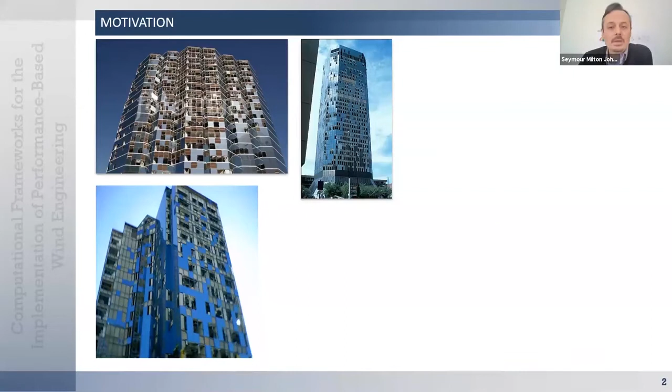The motivation for this work comes from the significant damage that can occur to engineered buildings during severe wind events such as hurricanes. This is illustrated here with respect to the envelope system in hurricane winds in Florida, as well as to the structural system during these severe wind events, illustrated in terms of some yielding and some collapses that have happened.

So what we're going to do today is go through some of the tools that I have been developing in my research group for implementing performance-based wind engineering that are capable of mitigating these damages and losses through explicitly enabling the estimation of performance of the structural system, as well as explicitly estimating the performance of the envelope system. We're going to look at these two aspects, starting with methods and tools for estimating the performance of the structural system.

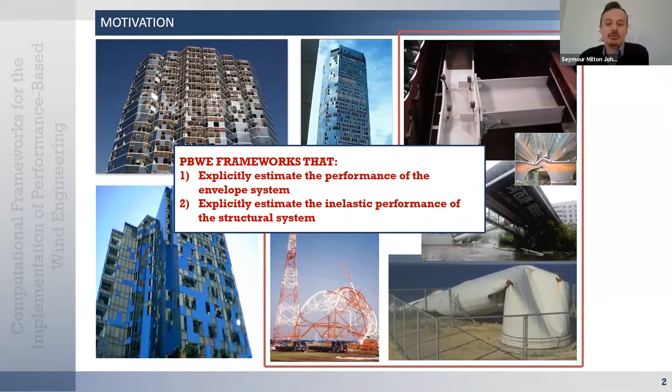Challenges in modeling and estimating the response of nonlinear or inelastic structures subject to severe winds include the need to model and capture ratcheting failure in alongwind-type loading, as well as the need to capture failure due to potential low cycle fatigue, which occurs in acrosswind-type loading scenarios where we get alternating plasticity in long duration loading. These two potential failure mechanisms are unique to wind as compared to seismic engineering, where we're more used to carrying out nonlinear analyses, so they require special attention.

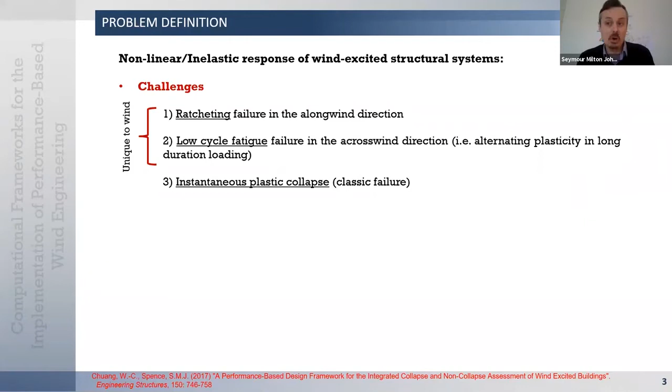Thirdly, we need to be able to model and capture more classic instantaneous plastic collapse.

Before we get into how we've been looking at doing this, some of the benefits in allowing the structural system to be nonlinear or inelastic during severe winds include the possibility of designing more economical structural systems without compromising reliability, as well as gaining knowledge of the ultimate response behavior of the structure, even if we don't necessarily use it in satisfying reliability targets, as well as enabling the use of performance-based design, which requires knowledge of the behavior of a structural system over a full range of hazard intensities.

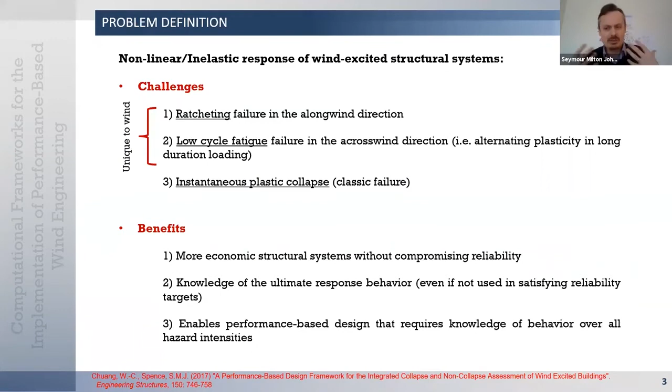In the tools and work in my laboratory, what we've been doing is developing models that enable the consideration of inelasticity or nonlinearity in the structural system through allowing a state of dynamic shakedown during an extreme wind event. So what do we mean by this?

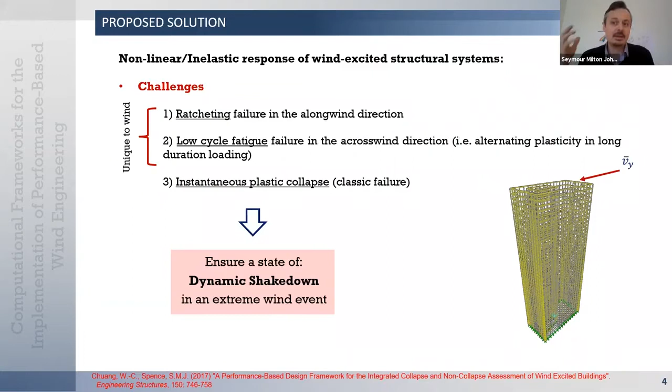Let's say we have a structural system, and that structural system is subject to a wind event, which is characterized in terms of intensity by the maximum mean hourly wind speed at the top of the building.

We can then associate aerodynamic loads, so time-dependent aerodynamic loads acting on the structural system. What we want to do is, under these loads, allow inelasticity to occur, but ensure that the state of dynamic shakedown is reached. This state of dynamic shakedown is a performance objective, something we are trying to achieve to ensure safety against these failure mechanisms.

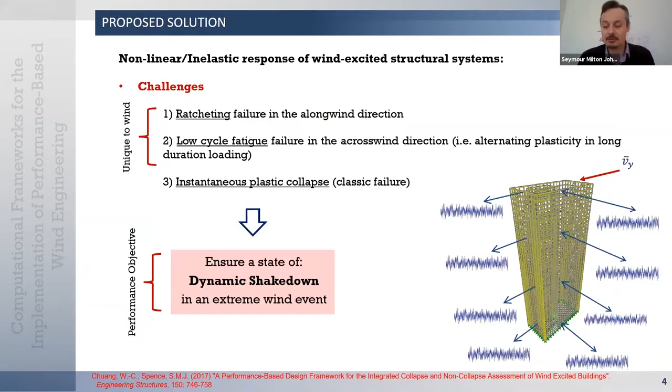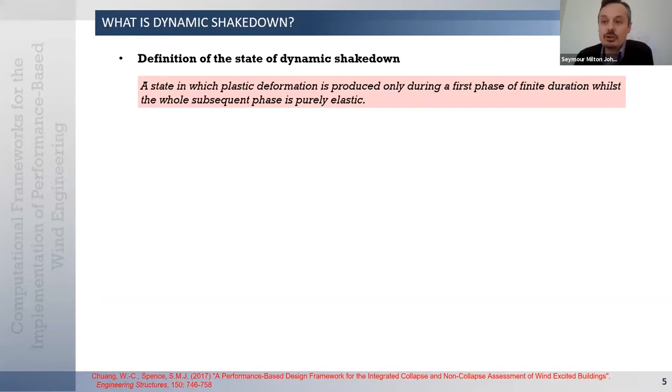So what is dynamic shakedown? It is a state in which plastic deformation is produced only during a first phase of finite duration, while the whole subsequent phase is purely elastic. If this occurs, the structure is said to shake down to a purely elastic state, or to adapt to the loads. Shakedown on its own implies the finiteness of overall plastic deformation.

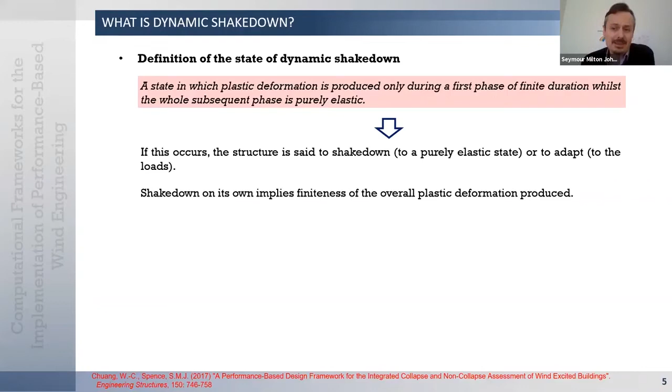Using the theory of plasticity, one can demonstrate that if shakedown occurs, the structure cannot fail due to ratcheting — an along-wind type failure mechanism for a wind excited structural system — or low cycle fatigue failure, which is a type of crosswind or alternating plasticity, low cycle alternating plasticity failure, or instantaneous plastic collapse. It ensures safety against these kinds of failure mechanisms.

So how can we go ahead and identify this state of dynamic shakedown? We can use a direct approach. In this approach, what we want to do is consider some dynamic time-varying loads on the structural system that are periodic and of infinite duration — so it's a periodic, infinite duration loading.

What's important to recognize here is that what happens within the period is completely free, it's arbitrary. So you can consider a stationary, a non-stationary, any type of dynamic wind load history one wants to consider in that period. We are just considering that load history repeated indefinitely.

We then go ahead and consider the material to behave in an elastic, perfectly plastic fashion. That can be at the level of individual fibers, if you're looking at a fiber discretization, or it can be at the level of the section resultants, so the section resultant deformations as well as forces.

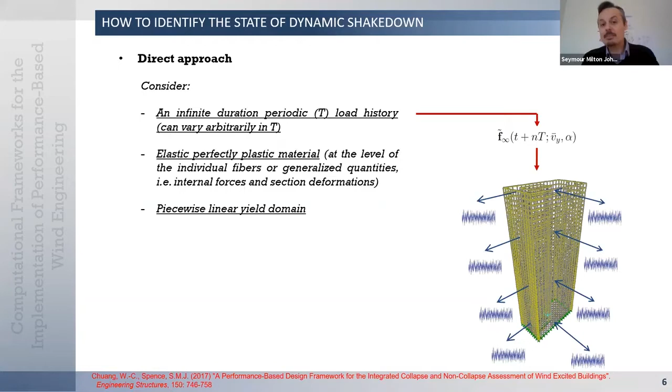And then we go ahead and consider a piecewise linear representation of any yield domains we might be considering. Therefore, we represent these failure domains as a series of flat surfaces. Now, this is not a limitation, because we can consider as many flat surfaces as we want and get a higher resolution representation of that domain — as high resolution as we desire.

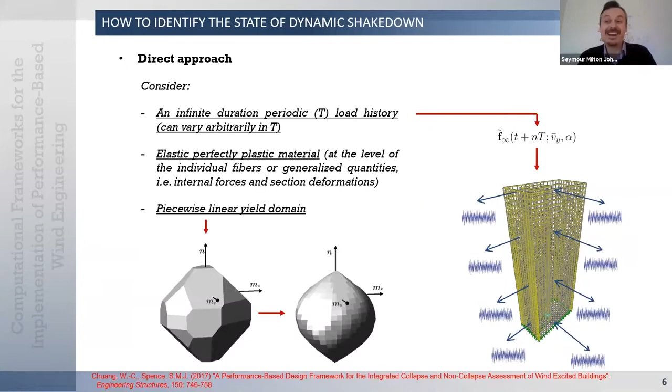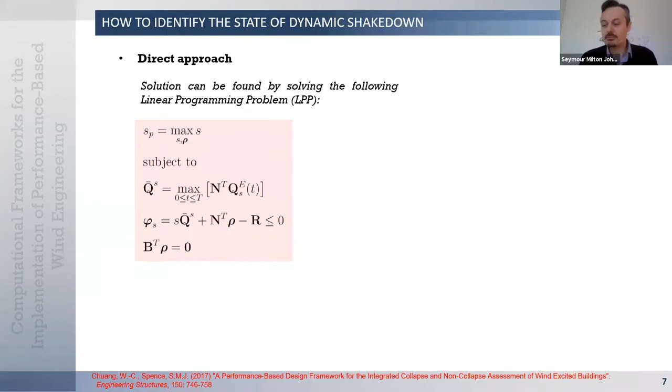So how do we go ahead then, once we have these assumptions, and estimate the state of shakedown, or whether the state of shakedown has occurred? What we need to do is go ahead and solve the following linear programming problem, which is a standard optimization problem, in terms of S here.

So what is S, which we're trying to maximize? S is a load multiplier, a scalar that we're going to use to amplify those dynamic time-dependent loads acting on the structure. So we're just going to amplify the entire loading history through this multiplier, and we're going to try and look for the maximum amount we can amplify them in terms of rho here.

So what is rho? Rho is a time-independent, self-equilibrated stress state. It's the stress state that is associated with plastic distortions that occur if we are in an inelastic response regime. We're solving for the maximum load multiplier while considering the three constraints we can see beneath the optimization problem.

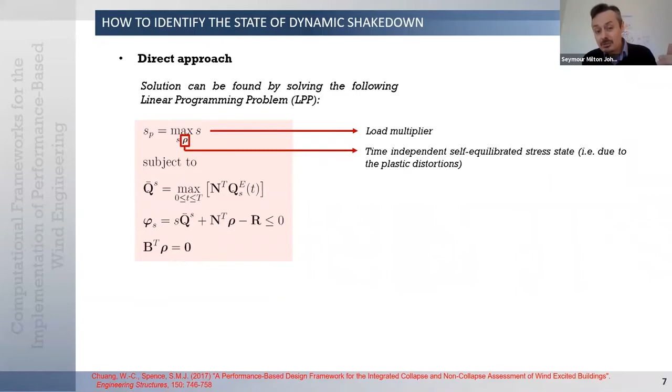These constraints: the second is simply the yield domain, so we've got to be inside the yield domain at each integration point of the discretization. Then the third is simply compatibility. What's interesting is the first, and this is representing the excitations within the structural system.

And what we want to note here is that it's actually in terms of the purely elastic steady state response in that one period of loading. So we're going to solve this considering only elastic responses.

What we can state is this: if this multiplier is greater than 1, we can amplify the loads above and beyond that actual value, which is when S equals 1, the structure will shake down under that loading history. So even though we've got inelasticity, we're going to be safe from potential failure mechanisms.

We can also observe that if we impose that self-stress state to be equal to 0, what we're imposing is that we don't have any inelastic distortions, and therefore we're actually finding the limit at which we get first yield somewhere in the structure, associated with how we design structural systems for wind in current practice. So if SE is greater than 1, under the real load history we have, we're going to have a purely elastic response state.

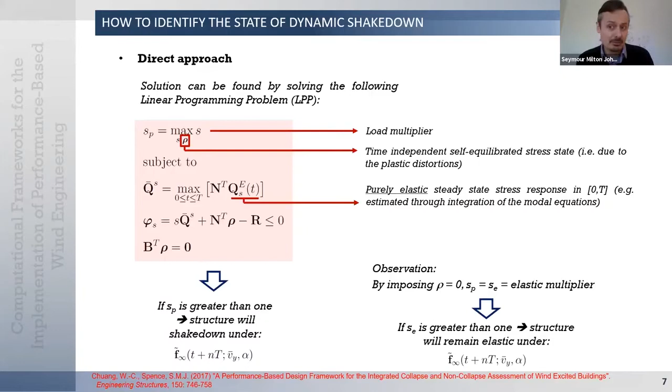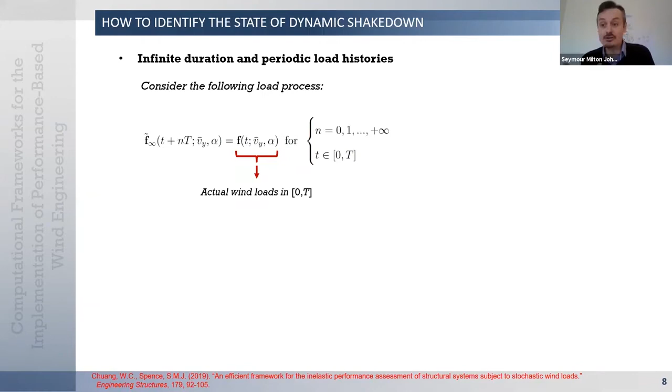So let's go back to this loading. We said that these loads need to be infinite duration and periodic. What does this really mean, and how do we do this? In practice, all it means is that we take a wind loading history of interest of duration t, and we consider it repeated indefinitely. What's important is that whatever happens in that loading period can be any type of load we want it to be. It can be stationary, non-stationary, anything we need it to be.

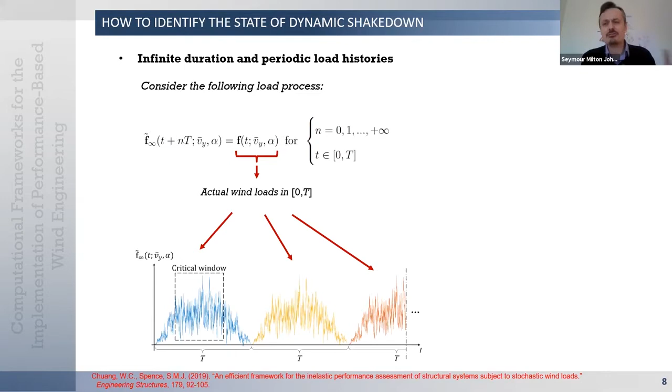For example, we can go ahead and use wind loads directly estimated from wind tunnels—wind tunnel specific or building specific aerodynamics. Or we can take that aerodynamic information and calibrate more sophisticated stochastic models for representing the record-to-record variabilities one would see in the aerodynamic loads. That's what we've been doing in the models we've developed, using spectral proper orthogonal decomposition—using information on how those aerodynamic loads behave from the wind tunnel, but then calibrating probabilistic models that allow us to capture record-to-record variability.

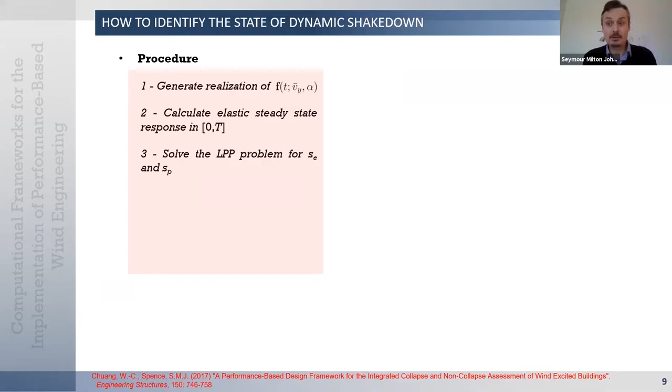So this is the loading process. Once we have a representation, a model for the loads, all we need to do to estimate whether the system is going to shake down or not is consider the realization of the load we want, calculate the steady state elastic response for one period of loading, and then solve that linear programming problem.

At that point, we can take the multiplier, the scalar we can multiply the dynamic loads with, and say that if SE, the elastic multiplier, is greater than 1, then the structure simply remains elastic under the loads, satisfying current design practice, which requires that structural systems are elastic under extreme wind loads.

If the elastic multiplier is less than 1, but the shakedown multiplier SP is greater than 1, the structure will shake down under that loading history. Finally, if the shakedown multiplier is less than 1, then the structure will not shake down. So these are the 3 outcomes we can get.

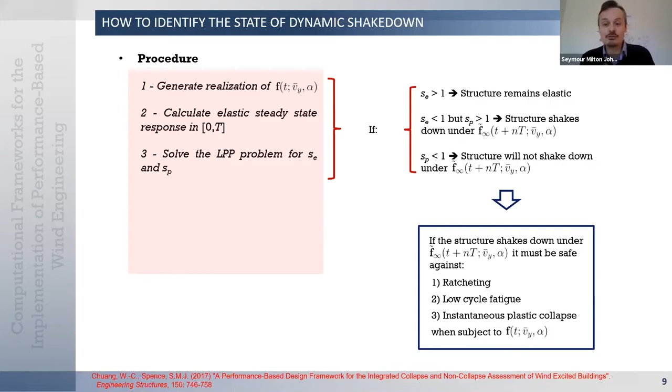In particular, if the structure shakes down, so that our shakedown multiplier is greater than 1, what we can say is that the structure under that load history is safe against failure due to ratcheting, low cycle fatigue, or instantaneous plastic collapse under that load history.

What we can then go ahead and do is consider any number of load histories we want, and solve one of these linear programming problems, getting information on the probabilistic distributions of the two multipliers. What we can actually observe is that this linear programming problem is extremely efficient to solve, even for very high dimensional problems.

Also, in defining the constraints of the LPP problem, we only need to calculate elastic responses. This means that if we have very long duration loads, for example wind loads associated with hurricanes, we can solve this type of problem and propagate uncertainties through it to get estimates of probabilities of having a safe inelastic state.

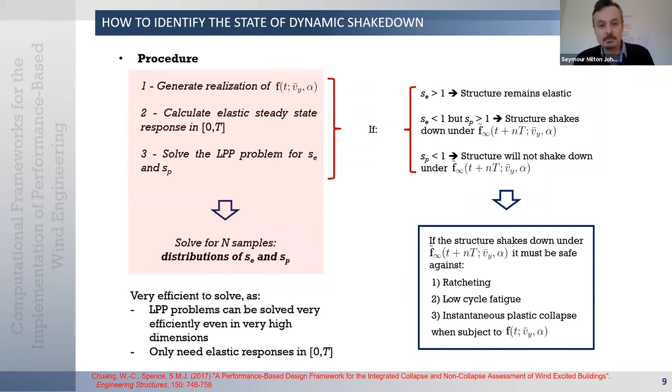So non-shakedown can only be considered as one possible collapse limit. This is important. In general, collapse will involve multiple limit states. For example, we may have incapability to reach the state of shakedown, but we may also have excessive residual or peak displacements at shakedown, or excessive plastic deformations at shakedown.

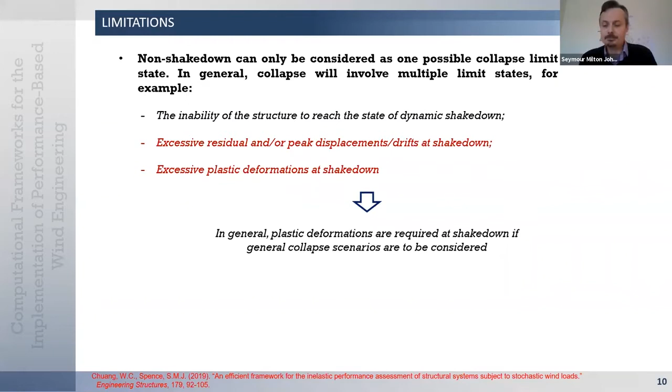So in general, plastic deformations are required at shakedown if general collapse scenarios are to be considered and estimated. One of the problems we can highlight is that by solving an LPP problem, which is a relatively classic way of treating a shakedown problem, we don't get any information on the plastic deformations. That's a limitation.

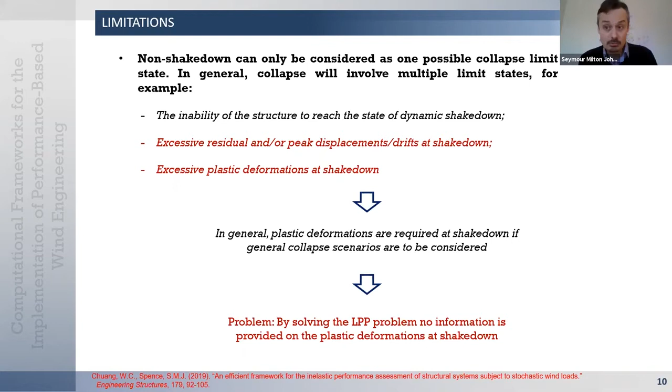To overcome this, over the past 2 or 3 years, we've developed a number of new algorithms and tools to be able to solve the shakedown problem and also estimate the deformations, all the plastic deformations at shakedown. So how do we do this? We use an indirect approach—this is a path-following algorithm. The basic idea is to estimate the state of shakedown through algorithms that follow a simulated path.

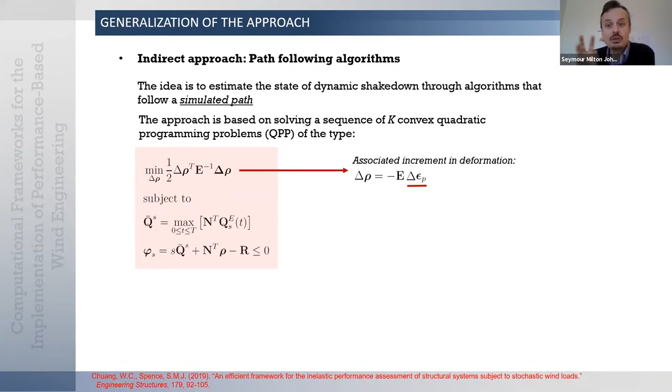So the approach is based on solving a sequence of K convex quadratic programming problems of the type shown here. In practice, what we're doing is looking for increments of that self-stress state rho, indicated here as delta rho. But we're going to associate with each increment of the self-stress state an increment in deformation, delta epsilon p, so of plastic deformations. And we do this through a return mapping scheme.

So what this allows us to do is that once we solve this sequence of quadratic programming problems, not only do we have knowledge of whether the structure will shake down or not, but we can calculate the plastic deformations associated with the state of shakedown. And then what we can do with this knowledge is estimate a full range of responses at shakedown, considering the inelasticity that has occurred inside the system.

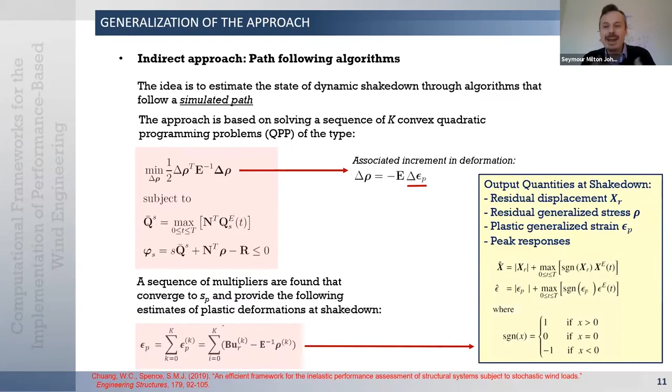So we get direct estimations of residual displacements, residual stress states, plastic generalized strains at all the integration points, as well as peak responses that have contribution from the inelastic state. So we can use these to evaluate acceptance criteria associated with a whole range of limit states.

So to give a summary of how this works, in practice we need to create these finite element models, for example in OpenSees, where we model the entire structural system. We need a load model for the aerodynamic load on our system, that's generally calibrated to some wind tunnel data, so we can capture phenomena such as vortex shedding or detached flow.

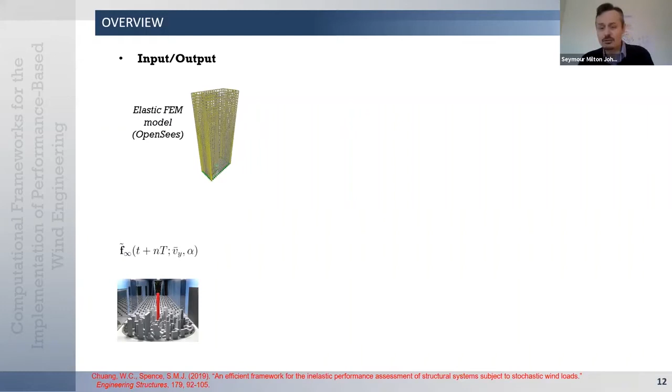We then bring these two together, and in particular, using those LPP problems together with the path-following algorithms, we can solve the shakedown problem, and we get answers to questions such as, did the structure experience inelasticity? If so, did the structure shake down?

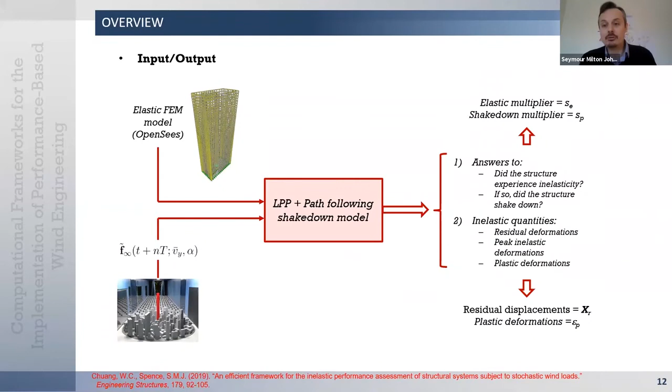Now, with the path-following algorithms, we also end up being able to directly estimate all the inelastic quantities. So you know what the residual deformations are, peak inelastic deformations, plastic deformations, etc.

What's fundamental to observe here, for a wind event of duration of 1 hour, so let's say we take a nominal 1 hour wind event, this is around 2 or more orders of magnitude faster than using classic direct integration approaches.

And if you're considering longer events, such as hurricanes that can go on for hours, these algorithms are even faster. They become multiple orders of magnitude faster than direct integration because you only need elastic response estimates.

So what this means is that we can use stochastic simulation for assessing the probability of failure or the reliability of our systems, considering a whole range of uncertainties. Not only uncertainty in the loads, but uncertainties in all the properties within the system.

And this allows us to go ahead and estimate system-level failure probabilities that we can then use with state-of-the-art performance-based design criteria for estimating the safety of the system, or whether we meet performance objectives associated with inelasticity in the main wind force resisting system.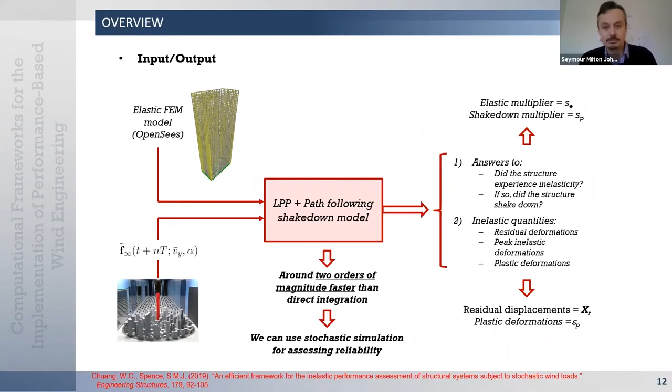So let's just go through an example here. We're going to look at a 59-story building that is an archetype building, which was provided to us by Magnusson Klemencic engineers. This is a building which was an archetype building located hypothetically in Seattle. It had a concrete core, and outriggers, a steel outrigger system with mega columns.

We had some nominal gravity loads we were considering here. The numerical model was made in OpenSees, had over 5,000 displacement-based beam column elements. We had about 5 integration points per element, etc.

We considered a whole range of uncertainties. Here we were considering uncertainties in the structural properties, so things like the elastic modulus of both the concrete and steel, damping ratios, material properties, the yield strengths of the concrete, the reinforcing in the concrete, as well as the steel members, so the steel strengths. We had load uncertainties in the dead loads, live loads, as well as the wind loads.

Here we were characterizing the wind hazard using maximum mean hourly wind speed to occur at the building top. We developed a site-specific hazard curve for a lifespan of 50 years. In developing this, we also took into account the uncertainties in the meteorological data.

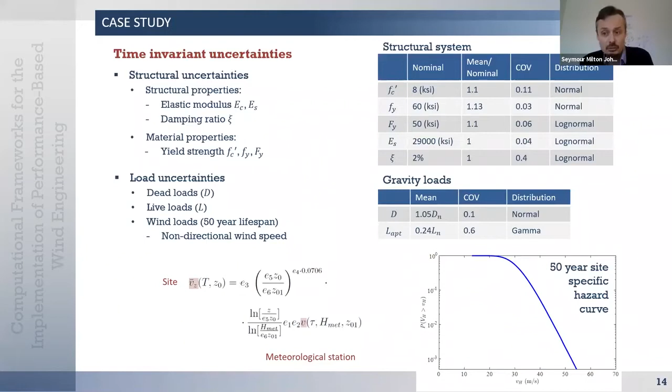We also considered uncertainties in the wind direction. To do this, a site-specific hazard analysis was carried out, which gave us directional factors that we incorporated into the analyses, considering uncertainties in these factors as well.

Record-to-record variability in the actual dynamic wind loads was captured through the spectral proper orthogonal decomposition model, where we calibrated it to specific wind tunnel tests for that building geometry. Uncertainty generated by the use of wind tunnels was also considered in calibrating the load model.

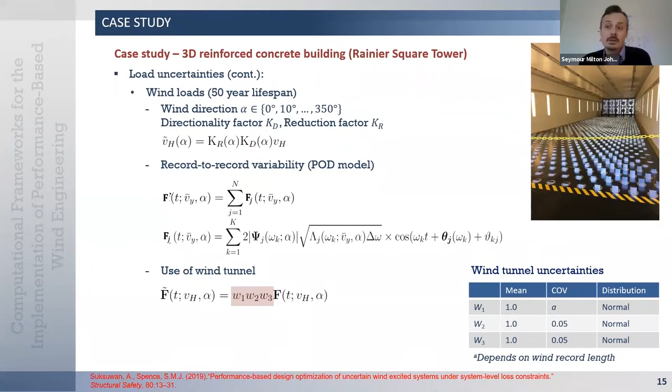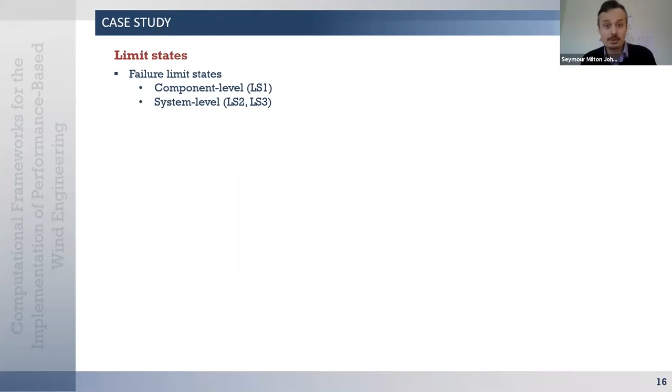Limit states we considered: first, the component level limit state. This was a classic design limit state used in design today—first yield in any one of the members considered separately. Then we had two system level limit states. The first one looked at member first yield anywhere in the system.

The second limit state here, LS3, the third limit state we considered in the analysis, was an inelastic limit state, where what we were looking for is non-shakedown or excessive peak interstory drift anywhere in the building. That means a peak interstory drift exceeding h/100, with h the interstory height, as well as permanent set—residual deformations or drifts more than h/500.

So that limit state LS3 allows inelasticity to happen in the structural system. Failure is when we get excessive peak interstory drifts, excessive permanent set, or we are not capable of reaching the state of shakedown—meaning we're potentially at risk of low cycle fatigue failure, ratcheting failure, or instantaneous plastic collapse.

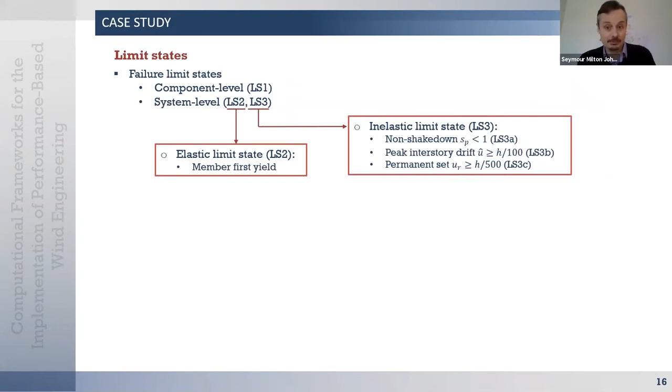We went ahead and calculated the probabilities of failure with respect to these limit states, considering all of these uncertainties. We did not use direct Monte Carlo here; we actually used a smart simulation algorithm to push the samples into the tail.

The results are as shown here. These are written in terms of the reliability index, transformed from the failure probability. We directly estimated failure probability and then back-calculated the reliability indexes for easy comparison with target values that can be found, for example, in the ASCE 7-16 design code.

So we just go back to these two—these are the first yield limit states. We can see the first one, LS1, gave us a reliability index of about 3, and that's associated with first yield, considering each component separately.

The second limit state is interesting—that's LS2—and it gives us the system level first yield reliability, which was 2.8, associated with yielding anywhere in the system. That's kind of a system level limit state associated with current practice.

Then LS3 here, this is our limit state based on inelasticity. You can see the reliability was about 3.3. And if we look at that a little bit more in detail...

What we can see is the reliabilities associated with non-shakedown are about 3.3, while reliabilities associated with excessive deformations were actually very high—peak interstory drifts over 4, and with respect to permanent set, over 7. That means this structure, which experienced inelasticity, did not deform excessively. This illustrates the usefulness of allowing inelasticity in these structural systems. We're using the systems more by allowing inelasticity, and we're not compromising reliability, as these systems are not deforming excessively.

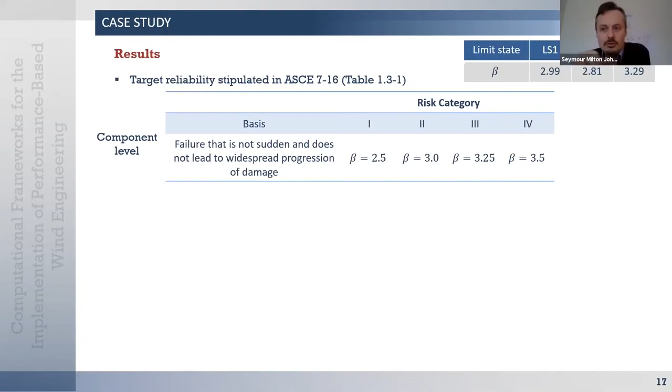Now, if we relate this to what we can find in literature, in particular target reliabilities coming from ASCE 7-16, the design or load code, what we can see is that at a component level, these were the stipulated target reliabilities. Our building is right here at risk category 2, as it was designed to be risk category 2, and it achieves a reliability of 2.99.

Now, if we look at system level—and this is where performance-based wind engineering says everything should be done and assessed at a system level—what we can observe here is that the reliability index at a system level of first yield, using classic design approaches, satisfies a risk category 1 building, but not a risk category 2 building.

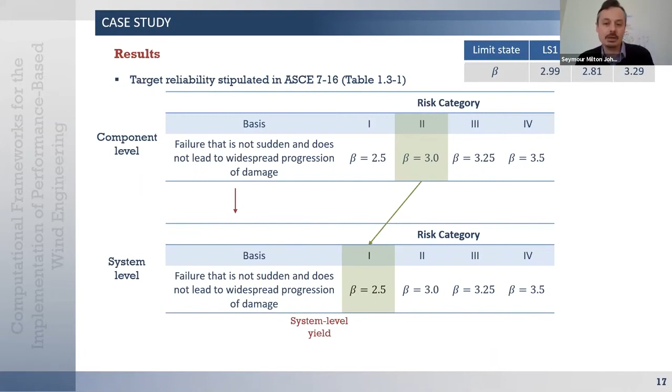However, if we allow inelasticity to occur safely using the criteria that we've introduced today, we can see that we can achieve a reliability of over 3.25.

So we get a risk category 3 building. We're using the structural system more, allowing inelasticity, and increasing the reliability because we know these inelastic states are safe. If we relate that to what reliability we'd need using classic methods to achieve this system-level reliability, we'd have to design to a risk category 4 building. So right now we can design a risk category 2 building with classic methods and end up with, if we look at system-level performance allowing inelasticity, kind of a risk category 3 design. That illustrates the usefulness of allowing some inelasticity and the tools we've developed here, which allow one to quickly estimate where one stands in terms of these reliabilities.

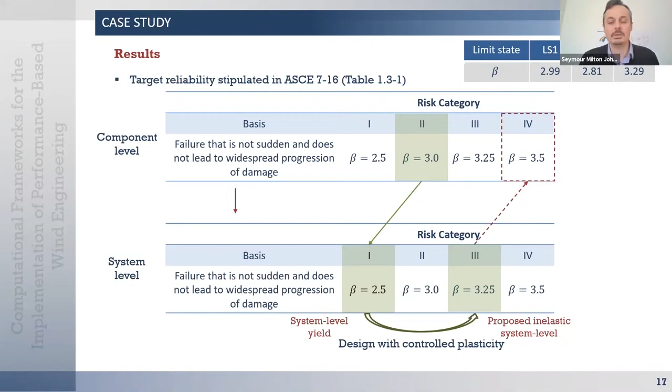This brings me to this document here. This is a pre-standard published in July 2019 for performance-based wind design, published by the American Society of Civil Engineers. I've got this here because it explicitly enables designers now to use the approaches I've just talked about. So those tools based on shakedown and allowing inelasticity at ultimate load levels are now contemplated in this document, as are the tools we've just outlined.

So performance-based design is moving towards allowing inelasticity during ultimate load levels for designing the main wind force resisting system, in a similar fashion to what we do with earthquake loads.

For more information, I've got a list of references you can use if you want more details on the models I've been discussing, some more details on the algorithms, and some more case studies. These are all publications we've put out over the past 2 or 3 years while developing these approaches.

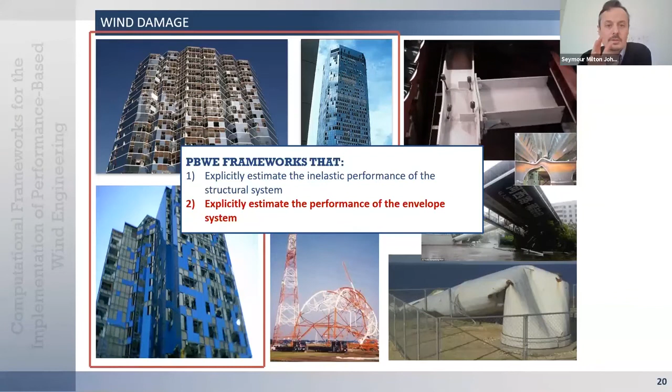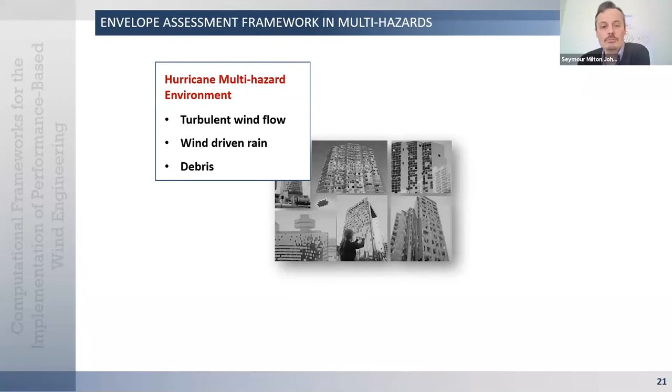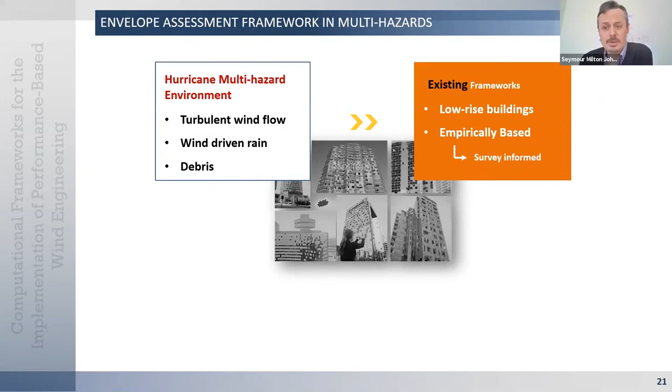This is a multi-hazard problem involving turbulent wind flow, wind-driven rain, as well as debris. Existing frameworks are really focused more on low-rise buildings and are empirically based rather than model or physics-based, so they can't be easily applied to engineered systems. The models I'm going to introduce in the next few slides were developed with the idea of applying them to mid- to high-rise buildings, based on physics models and data-driven models.

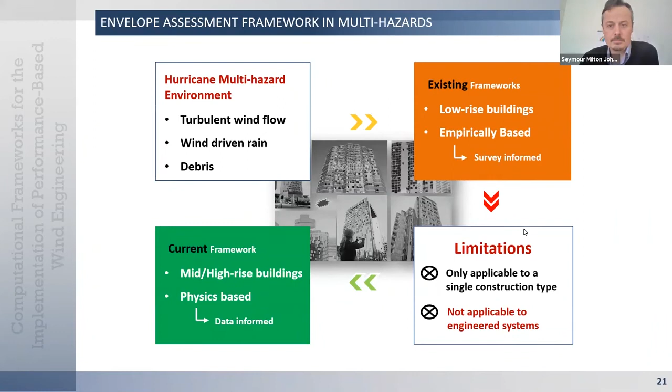The basic idea here is to estimate performance by solving the probabilistic integrals shown here. We want to assess performance as the mean annual rate of exceeding a decision variable threshold of interest, something like repair costs associated with damage to the cladding system. In general, we want to give a probabilistic description of the hazard and get a probabilistic description of performance through this mean annual rate of exceeding the decision variable threshold.

To do this, the first thing we need is a characterization of the hazards, in particular the wind hazard as well as the concurrent rain event. In general, we'd also have to characterize the debris hazard, but we're not going to discuss that today. The wind event, through local dynamic pressures, will directly excite the envelope system. It will also, through the aerodynamic loads on the structural system, excite the envelope system through interstory drifts. So both these mechanisms can cause damage to the envelope system.

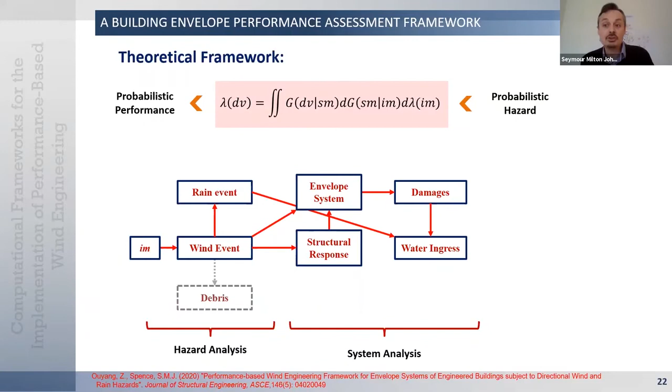These damages can lead to subsequent rainwater ingress due to the concurrent rain event. We want to estimate these damages as well as the water ingress, then take the damages and, through loss and consequence analyses, turn them into envelope losses associated with envelope damage, as well as an estimate of the total water ingress due to the damages. That water ingress would also be used for estimating the interior losses.

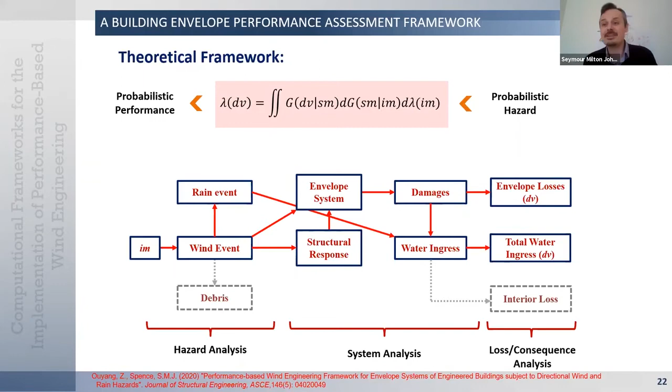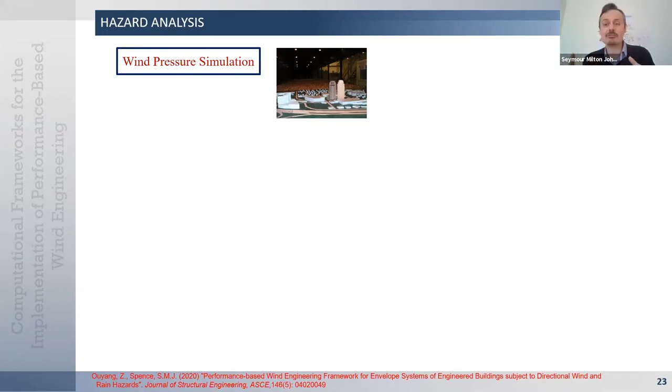With respect to the wind pressures, what we're doing is using wind tunnel data to characterize the aerodynamics of the building. In particular, the wind tunnel process comes directly from a wind tunnel test on the building, and we use spectral proper orthogonal decomposition that allows us to estimate the principal loading modes, which capture phenomena such as vortex shedding.

Once we have those loading modes, we can give them a spectral representation. Using a spectral representation model, we can capture non-Gaussianity through data-driven translation models, and that gives us a stochastic representation of the external wind pressures. Here, not only are we capturing the non-Gaussianity, we can also capture record-to-record variability that you cannot capture if you just use that one wind tunnel realization of the local pressure process on the outside of the building.

With respect to the rain event, we're going to represent the wind-driven rain through a time-average solution, using Eulerian multiphase models. These are based on representing the mean wind field around the building using a RANS model. We then use the Eulerian multiphase model to capture the turbulent dispersed rain around the building, and estimate the catch ratio, or wind-driven rain, on the entire building envelope. Multiplying the catch ratio by the horizontal rainfall intensity R of H, we get the wind-driven rain on each component of that envelope system.

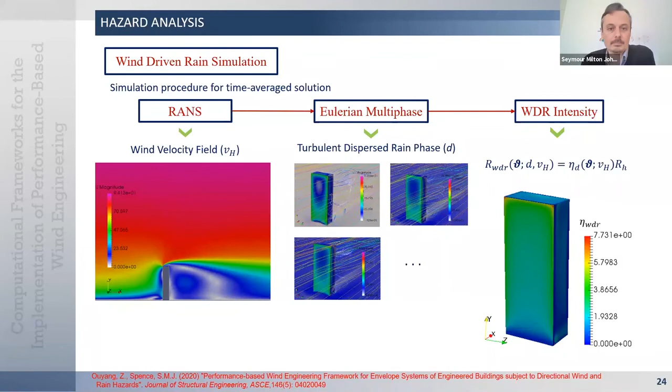Once we have the wind-driven rain, what we're interested in doing is estimating how the structure responds to the external loads in terms of drifts. To do that, we need to solve the classic dynamic equilibrium equation. For the excitation, the loads, we just integrate that non-Gaussian stochastic wind pressure model or field, which gives us the loads driving our dynamic equilibrium equation.

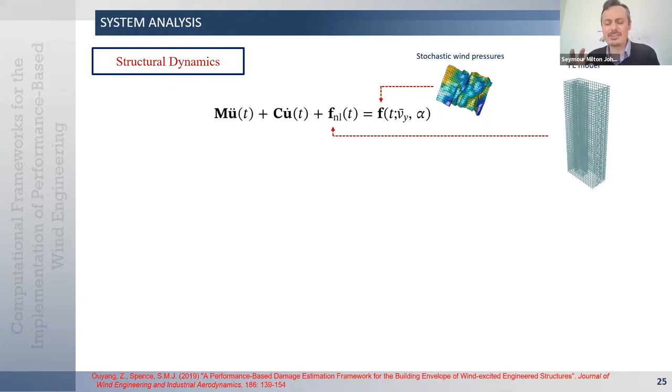For the restoring forces, we can use classic finite element models, or we can use models based on the shakedown theory that I introduced in the previous slides. That gives us a direct estimate of the time-varying dynamic drifts in our system.

Then what we need to do is consider internal pressures. These are also going to be dynamic, driven by the dynamic external pressures and any openings that may be in the envelope. Once you've got an opening, you get a dynamic internal pressure, which is governed by a nonlinear equation. You need to solve that for each opening, both the external openings and the internal openings at each floor.

As you go through, you end up defining a set of nonlinear equations that need to be solved iteratively at each time step as you progress through the wind event. What's important to observe here is that one needs to update the damage status of each component on the outside of the building at each time step, to ensure that the dynamic equilibrium is considering the current damage state.

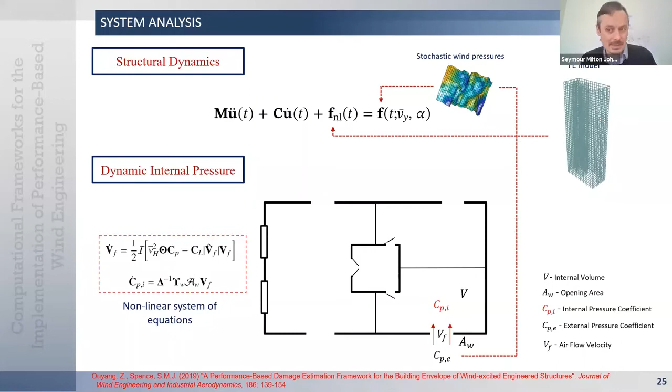With respect to damage, we take each one of our envelope components and consider them susceptible to a certain number of pressure-induced damage states as well as drift-induced damage states. So we have on each component of the envelope two demands, pressure and interstory drift. These are generally coupled, and we want to consider coupling between the damage states as well.

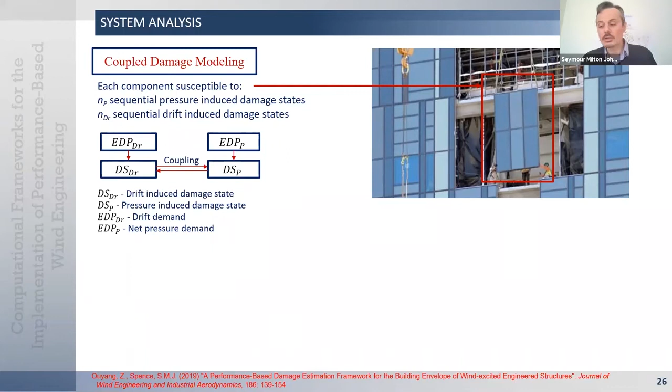What do we mean by that? If, for example, a drift-induced damage state occurs, it will in general affect the capacity of that component to resist pressure, net local pressure, and vice versa. To capture that, we've developed models based on coupled fragility analysis. In practice, we have initial fragility functions modeling the susceptibility of the component to a certain demand. Upon the occurrence of a coupled damage state, we degrade those, and we do this degradation in a probabilistic sense.

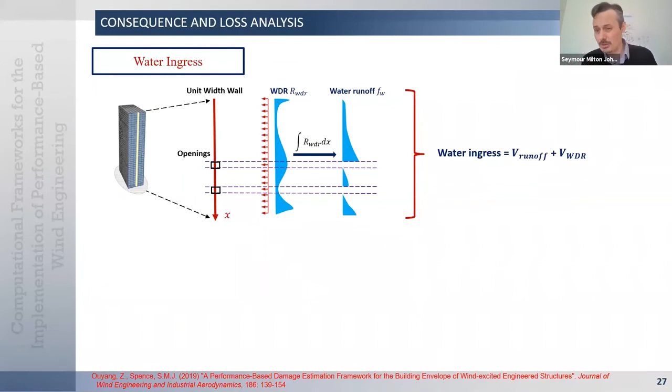For the water ingress, we said we're modeling this direct impact of the wind-driven rain through our Eulerian multiphase model, but we also need to couple that with a water runoff model because we need to realize that the water, when it hits that envelope, is going to run down. So if you get a damage, an opening, water is going to come in due to the direct wind-driven rain, but also due to water runoff. So we do need to model that aspect as well.

Finally, what one is interested in doing is estimating envelope losses. To do this, we can actually use what has been developed in seismic engineering. Once we know what the damage states are at the end of our event, so we quantify exactly what the damage states are for all our envelope components, we can use consequence functions to translate those directly into losses, taking into account uncertainty in this process as well as economies of scale. That allows us to translate everything into estimates of losses.

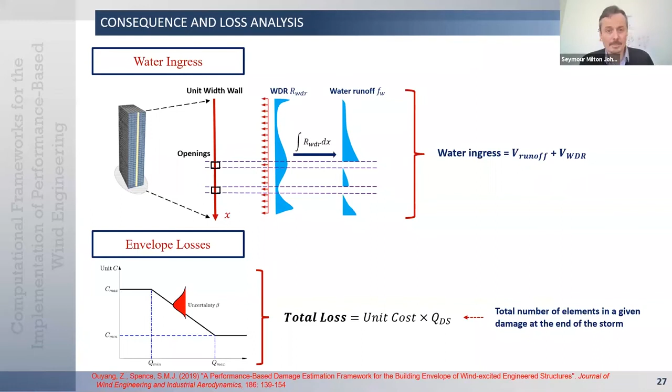So that gives a brief overview of the models inside this probabilistic integral that we now need to solve to get a probabilistic representation or estimation of the performance of the system. So we need, in a certain sense, to propagate uncertainty, particularly in the intensity of the event, through this integral to get the estimate of the performance.

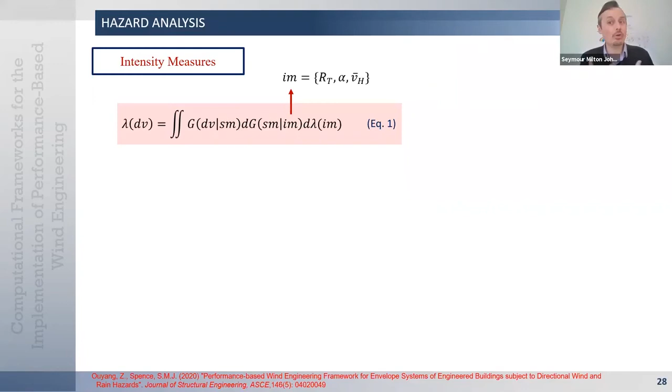So here, what we're going to do is briefly highlight what the intensity measures of the event are for us. The intensity measures are the vertical or horizontal rainfall intensity R of t, wind direction alpha, and the maximum mean hourly wind speed V of h to occur at the top of the building. These are all site specific. And implicit in here is the aerodynamics of the system, which are captured outside of the intensity measures.

It's convenient, when trying to solve this integral, to write it explicitly in terms of these intensity measures. We can do that using the total probability theorem. So we end up with equation 1 shown here. And then what we can do is go ahead and identify each one of these intensity measures and give them a probabilistic representation.

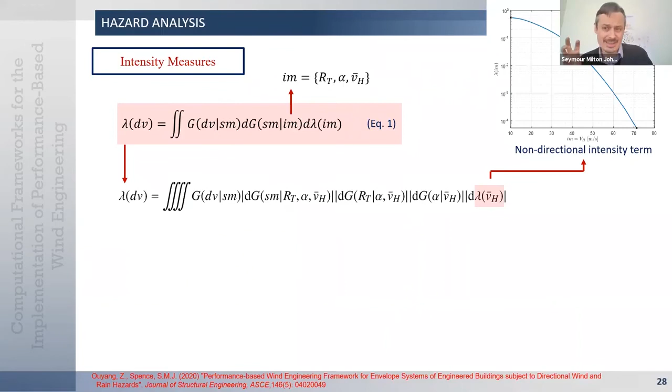So for example, here we have lambda of V of h. That is our non-directional intensity term. It represents the mean annual rate of exceeding a wind speed, maximum mean hourly wind speed of interest, at our site of interest. We then have this term here.

This is a complementary cumulative distribution function of wind direction given wind speed. It's a conditional distribution function. And this one here is going to model the directional characteristics of the site-specific hazard. What's important here is to recognize that to estimate this, we do need knowledge of the joint probability density function between the wind speed and the direction.

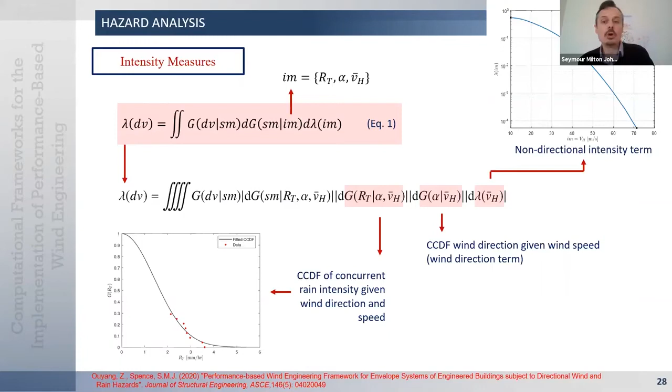And then finally, we have this term here, which is the CCDF of concurrent rain intensity given wind direction and speed. Now this would be a complex term to estimate. There are two conditional parameters here associated with the wind event. However, data suggests that this dependency is actually very weak. So in practical scenarios, one can take it as independent of wind direction and wind speed, making it quite straightforward to estimate.

Now, to evaluate this integral, in theory one could do it analytically. However, analytical approaches break down if one considers how high dimensional these integrals are, because here it looks like a fourfold integral, but actually it has a much higher dimension than that, because we're taking into account the stochastic nature of the loads. So these have dimensions on the order of thousands. So analytical approaches are not really possible.

Direct Monte Carlo approaches can definitely be applied. However, they have a huge computational burden because we're really interested in small failure rates. So in general, one has to use some type of smart simulation, stochastic simulation scheme. In the citation at the bottom of the slide, you can find some that we've developed over the past couple of years specifically for solving this integral with a limited number of samples.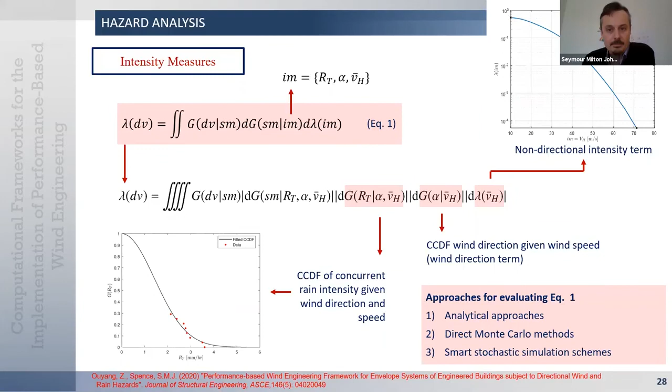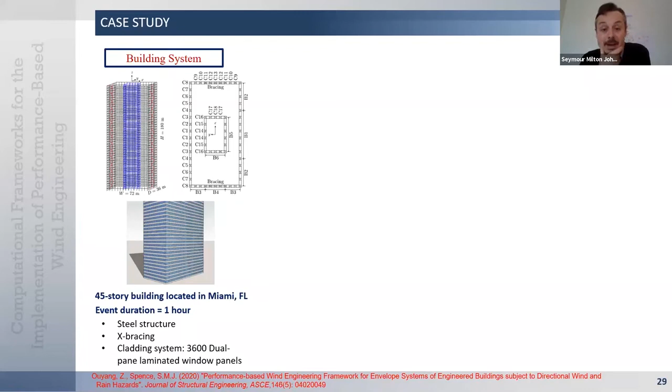So let's go ahead and look at a case study here. This is again an archetype building to illustrate this performance-based framework. Here it's a 45-story building located in Miami, Florida. The duration has a nominal length of 1 hour. We're considering a steel structure with some X bracing on the smaller, shorter faces. The cladding system, what we're interested in, is composed of 3,600 dual-pane laminated window panels.

Now, each one of those panels, we're going to consider to be susceptible to two drift-induced damage states associated with glass cracking and then glass falling out. And the demand here is interstory drift.

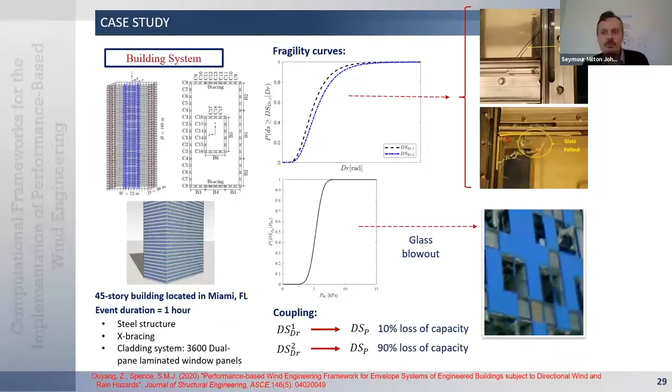We also consider each component susceptible to a net dynamic pressure-induced damage state associated with glass blowout. These damage states are treated as coupled, so the occurrence of the first drift-induced damage state results in a loss of capacity for resisting net pressure of around 10%, while the second drift-induced damage state results in a loss of capacity of about 90%. In implementing this framework, we treat these dependencies as uncertain, since they're very hard to exactly quantify, so they're handled as uncertain in the simulations.

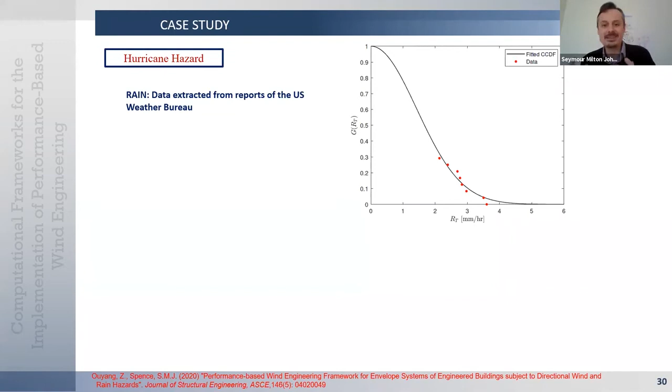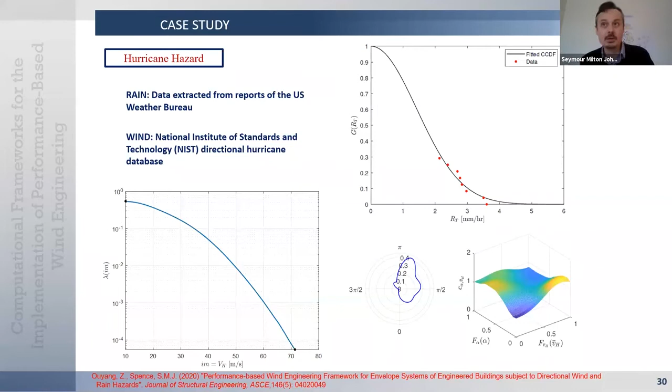For the hurricane hazard, we need to describe three intensity measures: horizontal rainfall intensity, wind speed, and direction. For rain, we extracted data and fitted the CCDF directly from the US Weather Bureau, giving maximum horizontal rainfall intensities in Miami during hurricanes. For wind, we used a database from the National Institute of Standards and Technology, which has wind speeds and directions associated with various mileposts along the US coast, and we chose Miami. This allowed us to directly quantify the site-specific hazard curve, the mean annual rate of seeing a maximum mean hourly wind speed at the top of the building, as well as the joint probability density function to get the directional term, using copula functions.

For aerodynamics, we characterized the local net pressure through a database from the Tokyo Polytechnic University, and calibrated the stochastic model I mentioned earlier. To do that, we used a kernel-Pareto mixture model to capture the non-Gaussianity, a translation model based on that kernel-Pareto mixture, and we used 10 spectral modes to capture the energy.

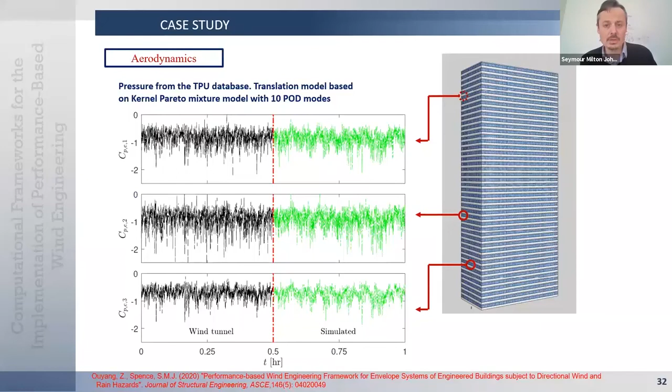This is a quick visual illustration of the difference between the wind tunnel time histories and one simulated representation of the pressures. On the left we have the wind tunnel data in black, and on the right the simulated data in green. Just looking at this visually, you can see we are capturing the stochastic nature of the local pressures.

With respect to wind-driven rain, a question that could come up is, if you're doing a stochastic simulation, don't you need to run the wind-driven rain Eulerian multiphase model for each realization of wind speed and wind direction? In general, the answer is yes, but to get around that we use interpolation. We run some predefined wind directions and wind speeds, and then interpolate for any other wind direction. Here we show one or two of the wind speeds and directions we considered in setting up that interpolation scheme with the wind-driven rain.

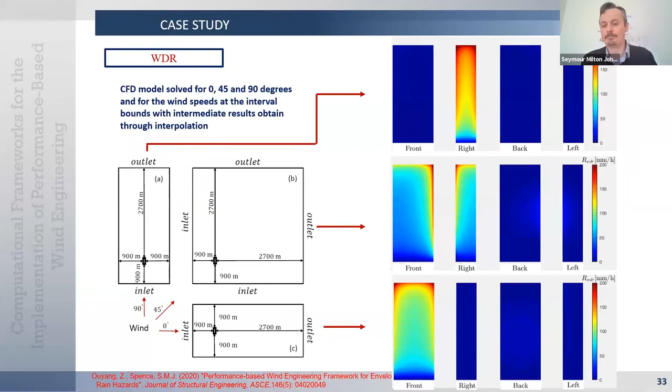The first damage state was drift induced, glass cracking. The second was drift induced, glass fallout. And the third was pressure induced, window component blowout.

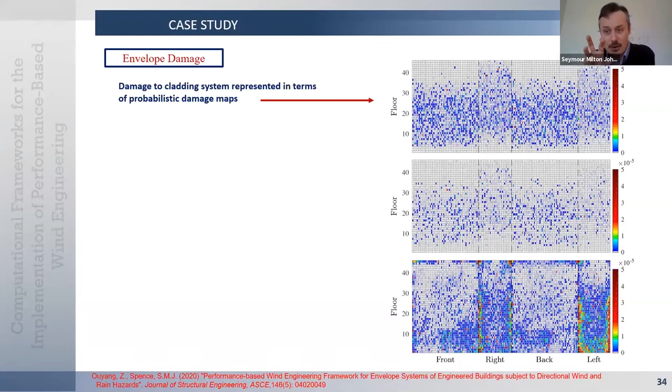The blue curve is the mean annual rate of exceeding a certain number of components in a pressure-induced damage state at the end of the event, while the black and red curves look at the two drift-induced damage states. What's interesting is that while the pressure-induced damage state is the governing one, the drift-induced damage states, the black and red curves, do exist and are not negligible. You should also observe that these results consider the coupling between the damage states.

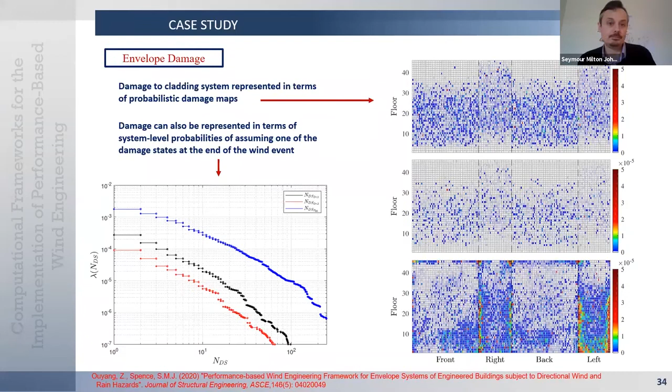Once we have these damage states, if we know what they are at the very end of the event, we can translate those using consequence functions into system level estimates of losses and consequences. Here on the top right is the mean annual rate of exceeding a repair cost associated with damages to the cladding components.

As we move up for low failure rates, we begin to see quite a significant amount of damage occurring to this cladding system. The bottom panel looks more at the consequence of that damage, the mean annual rate of exceeding a certain amount of water ingressing into the building due to damage to the cladding. For small failure rates, like 10 to the power of -5, there is a significant amount of water that will get into these buildings, causing significant internal damage.

These kinds of measures were estimated using stochastic simulations. We can deaggregate them any way we want, like we do with classic performance-based design. For example, looking at water ingress, we can deaggregate that into packets of three floors, and we end up with a plot giving the mean annual rate of having a certain amount of water ingressing every three floors, giving us an idea of where the water is most likely to enter.

We can deaggregate any way we want. This is just an illustration, so we could deaggregate to each floor, to a building face, or right down to a building or component level. It's very general, allowing a lot of flexibility in defining the performance metrics.

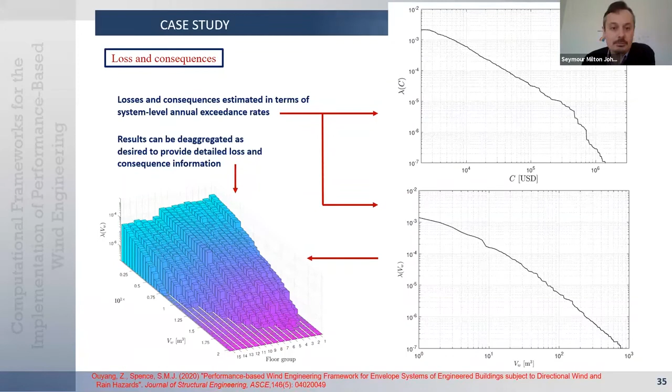So again, for more information on these approaches, I've added some citations at the bottom there. These are associated with the performance models we've developed for implementing performance-based wind engineering and the envelope system. Those are where you can find more detailed information on those models and how we apply them to the case studies.

So this brings us to our concluding slides. With respect to the performance of the structural systems, the main wind force resisting system, performance-based design and tools, we ended up looking at some efficient computational frameworks for characterizing the inelastic response based on dynamic shakedown theory.

Contrary to direct integration approaches, these models can estimate the inelastic response for a single windstorm in a matter of seconds, even for very long duration windstorms. We're looking at estimating a safe inelastic state for these systems within a matter of seconds, for windstorms that can go on for hours. This is a very efficient and practical approach to allowing inelasticity.

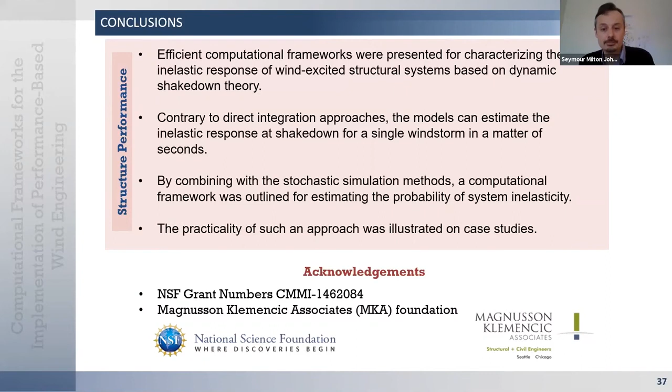Then by combining with stochastic simulation methods, we looked at how we can define computational tools that give us the probability of failure for the system, so system inelasticity. We looked at being able to directly estimate that using these tools combined with stochastic simulation, and we illustrated that on an archetype structure.

In the last part of the presentation, we looked at computational models for performance assessment of the building envelope of wind-excited structures. This framework integrates wind tunnel-informed stochastic loads, CFD, wind-driven rain models, and coupled fragility-based damage models for estimating the damage at the end of the wind event. Then we saw how we can integrate that with loss and consequences to get system-level estimates of losses, in terms of metrics familiar to those who work in performance-based design in general.

Again, we illustrated this on a case study where we saw the importance of considering both pressure and drift-induced damage states, as well as the amount of water that can get into these buildings once the envelope systems get damaged. With that, we come to an end.